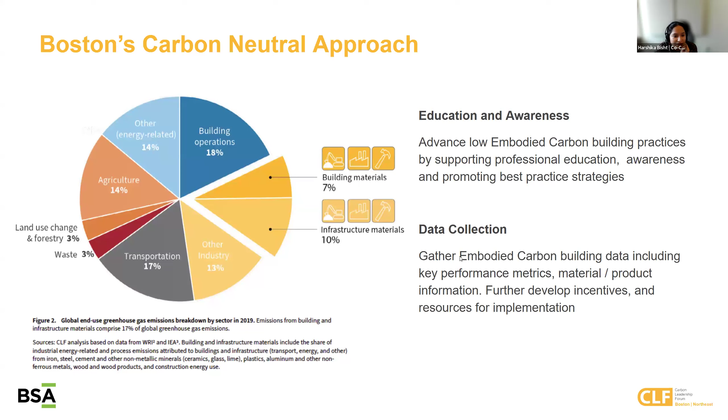These have been great steps that these cities have taken, including the net zero carbon zoning in Boston that, as Harshika mentioned, comes into effect next month. But these citywide regulations have really laid the groundwork for thinking on embodied carbon regulation.

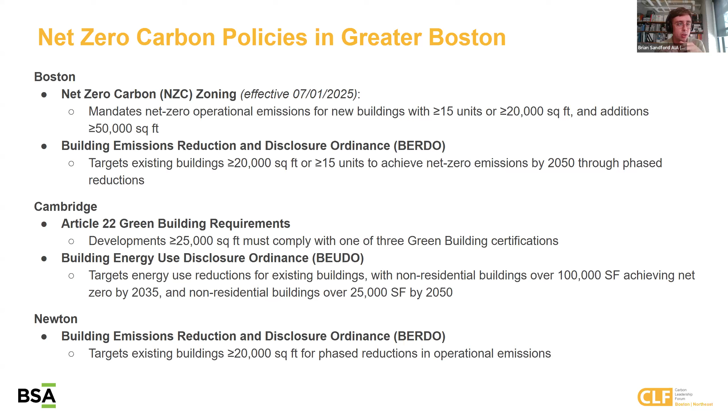Next, we have a quick intro to what's happening at the statewide level. Back in November, the governor signed a big climate omnibus bill. There's lots of stuff in here, but most relevant for our conversation is the Intergovernmental Embodied Carbon Coordinating Council. It's a bit of a mouthful, but it's this big council.

I know we have some members here on the call. There's folks from a bunch of different backgrounds on it, from the state, both the executive branch and legislative branch, as well as some professional appointees. What the council is working on is an embodied carbon reduction plan. This will have a whole bunch of recommendations, many focused on state building projects and procurement, and all those things the state can control directly.

But also, the bill specifically calls out that the council is charged with considering how to integrate embodied carbon reduction goals into state building codes, which would impact every building in the state, which is really exciting. To be clear, this is just getting going. These will be recommendations from the council, certainly not rules enacted quite yet. But I think this is part of this broader movement and trend that was kicked off by local municipalities.

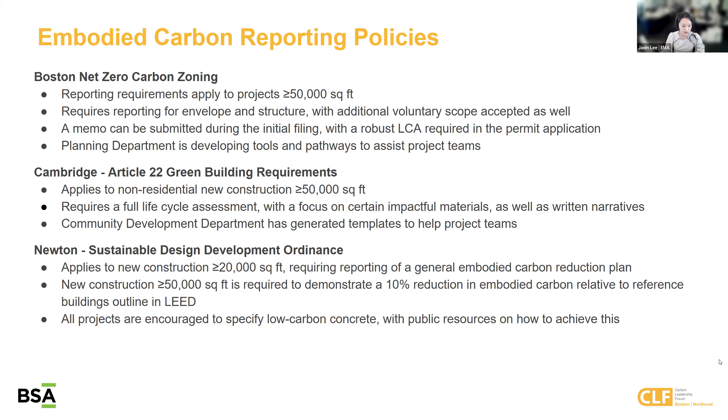If you see, the Boston effective date is coming up very close - it starts July 1st. Cambridge, the requirement already started. So did Newton, and the ILFI standards remain current. So does LEED. And that is all for the local policy section.

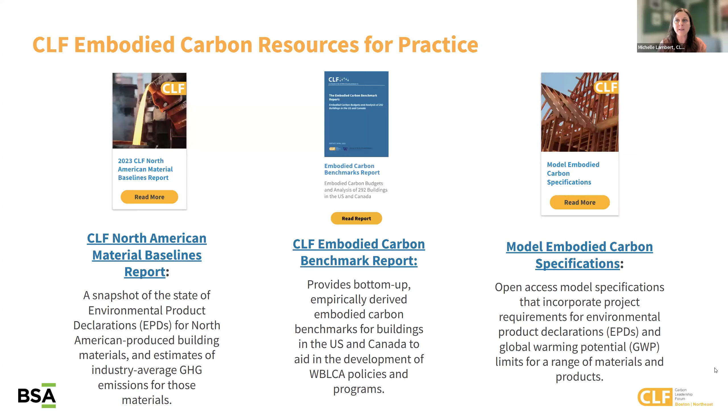Then just very quickly, we have a brand new compilation of 13 project case studies, if you're looking for project examples from a whole different range of sizes and types of projects, to really understand what their process was and how they were successful. All of these projects submitted their LCAs to us for review and demonstrated embodied carbon reductions. So again, another fantastic resource for some really good inspiration and examples.

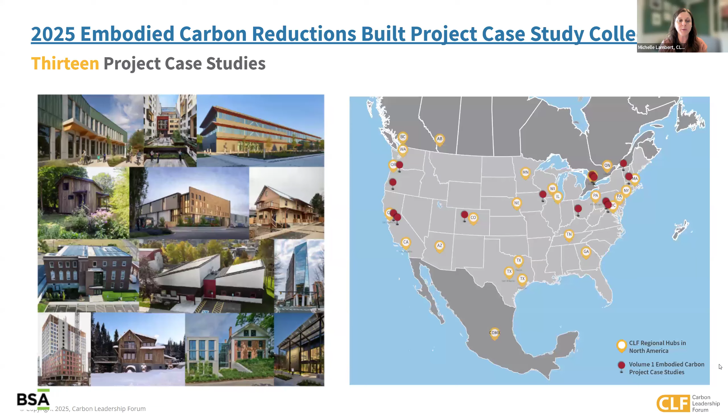The last resource I wanted to point to is that the CLF Boston Northeast Hub during COVID produced a whole series of recorded webinars that are on the BSA's website. You can see many different topics from many of the experts in our region, and each is a full hour recorded webinar on these different topics, so another phenomenal resource for digging into specific areas.

So how can you stay up to date? How can you get involved? There are three ways. You can join the CLF Boston Northeast Hub, an open membership community for anyone interested in learning.

Second is to attend the joint collaboration between the Boston Hub and the New York City Hub, which is an LCA tool user group that Jacob Savona, who is going to speak next, helps to run and facilitate. You can join that. And finally, the CLF nonprofit has a community forum on our website where you can submit your questions to the entire CLF community and get oftentimes a lot of really fantastic detailed answers. So make sure to check out all of those.

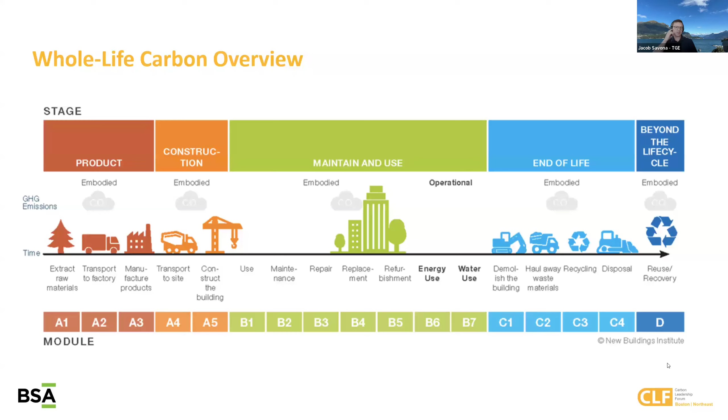Next slide please. So I wanted to run through some free early evaluation tools. Some of these are early tools, some can be used as a whole building LCA tool, but I'll explain that in a second.

I think the first and foremost, and probably the most popular one, is the EC3 tool, which is available to pretty much anyone with an EC3 account. You can use this tool to compare material-specific embodied carbon early in design using regionally specific EPD data, and you can complete what's called an A1 to A3 whole building life cycle assessment. Remember, that's just focusing on the materials themselves and not on construction plus maintenance and use plus the end of life of the building.

The next couple are the EPiC and CARE tools, which are really great quick whole building life cycle assessment embodied carbon estimating tools. You can put in minimal inputs to support early decisions around early concept designs for your projects, and understand some early design decisions and embodied carbon reductions that could or may not come from those decisions.

The next one is the BEAM tool, another free tool that's great at estimating embodied carbon across your buildings or portfolios.

You can use this for your policy or any benchmarking or high level assessments. This one can be used, I think, from SD to CA, but it is strictly A1 to A3, so it's important to note.

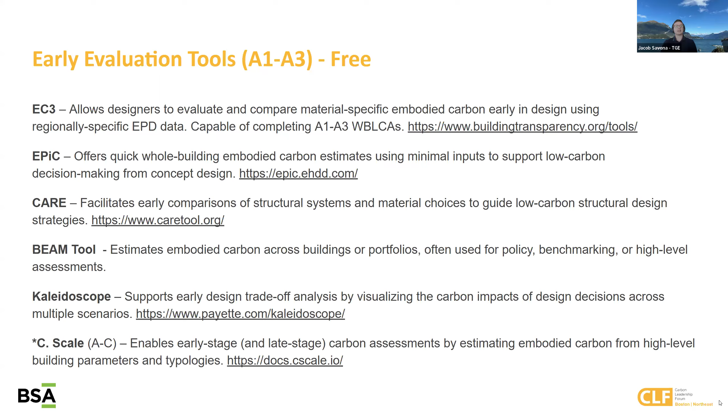Next slide, please. So here's the run through of the big three full whole building LCA modeling tools available. The first one to mention, and what's probably the most popular, definitely most comprehensive, and is widely used in Europe and starting to be used more readily here in the US, is the one-click LCA tool. One thing to note is that it is definitely the most expensive tool, around $5,000 per seat.

There is BIM integration, which is great for projects running in Revit. And it's important to know that it's easy to manipulate the model. What that means is you can put in your own EPDs into the model and understand the differences between industry average products and specific products with EPDs available. The most important thing to note specifically about the one-click LCA tool is that it puts the responsibility to create the model directly on the user, but it does allow the user to complete the calculations. That's a little different from the Tally tool.

I'd say Tally is probably the easiest tool for practitioners to use and get started with. It's really well integrated within Revit, and it's a little less expensive, around $1,000 per seat. The biggest difference between this tool and one-click is that it's kind of difficult to manipulate the model and use other EPD inputs. You can do that on your own, but it takes a little more practice and experience with the tool itself to understand how.

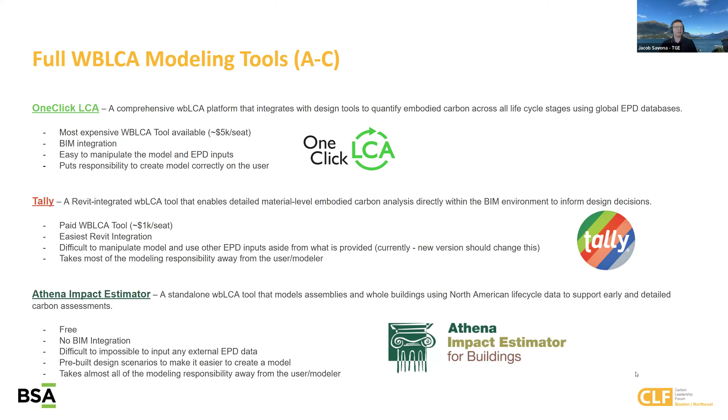Next slide, please. So where do all these tools lie in terms of the whole building LCA modeling workflow? From schematic design through CA, a lot of these free tools that I mentioned — Care, Epic, Kaleidoscope, the Beam tool, and C-Scale — can all be used in schematic design to understand different design or building scenarios. As you move through DD, you understand those design scenarios, maybe different assemblies, and start understanding the different reduction opportunities associated with each. Then moving through construction documents, that's when you can start to really use your OneClick LCA and Tally tools to understand the full embodied carbon assessment through design, through 100% CDs.

And then through the project procurement process, this is kind of just understanding, collecting all of the data around the materials that you're using on your project, getting product specific EPDs for all of those materials, or at least the relevant materials, and then finally conducting that full as-built embodied carbon calculation, which I'd say is probably the most important piece that we want to get into in the next slide.

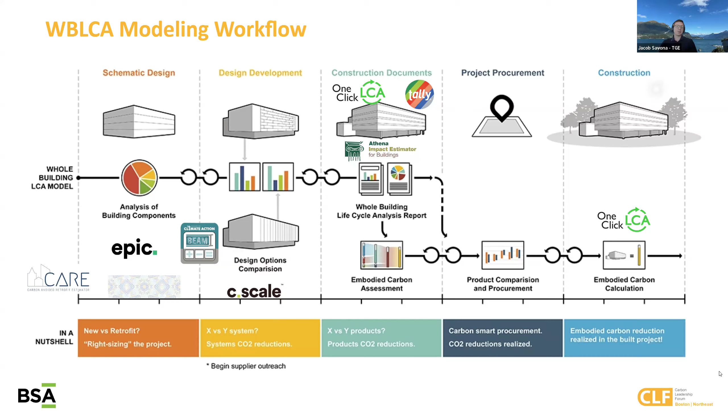Currently, the only tool that can do that is the OneClick LCA tool. That is the only one that can do that at the moment. Tally, I believe the new version of Tally will be able to do that. So that is important to note.

Once the next slide comes up, I'll just kind of run through. Sorry, just give me one second. Yep, no problem. In the meanwhile, folks, feel free to drop your questions in the chat, we'll try and answer them simultaneously. Okay, here we are. Sorry about that, Jacob. That's okay, just don't want to run over time. No, you're good.

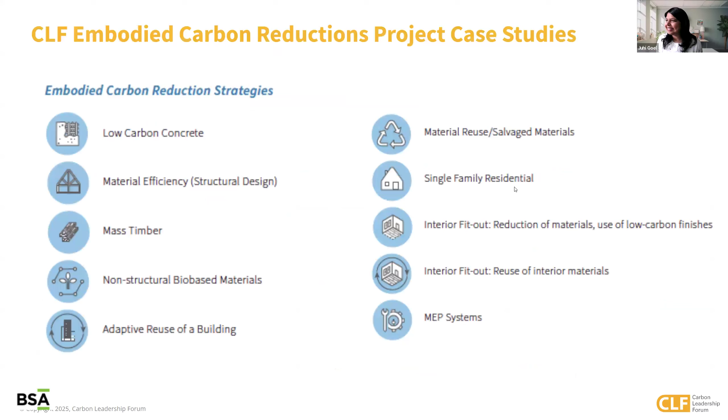Yeah, so just quickly understanding how to work with whole building LCA modelers, whether that's in-house, or whether you've designed, or whether you have a consultant working with you on your projects.

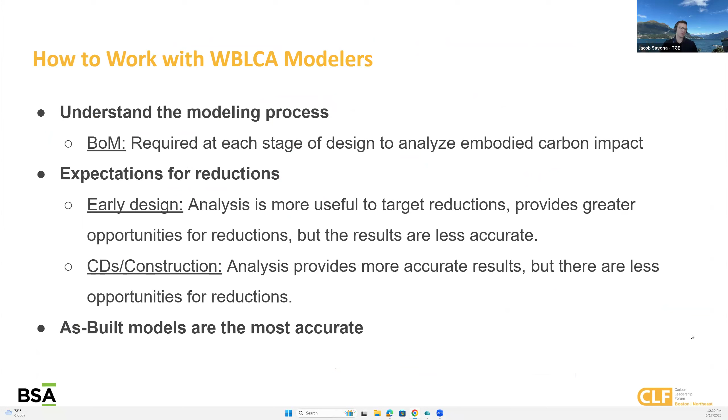First thing is first, I think the most important thing that you need to conduct an LCA is your bill of materials. This is basically required at each stage in order to analyze the embodied carbon impact at each stage, whether that's at SD, DDs is probably the earliest stage where you really have a more accurate bill of materials, and then obviously 100% CDs. And at the as-built model, that's where you're going to update that with what is actually being built in your buildings. It's also important to understand the expectations for reductions, and especially at which stage.

Early in design, thinking specifically comparatively to operational carbon, the earlier you can start looking at reductions and opportunities for reductions, this is when you're going to have more useful targets. You're going to have greater opportunities for reductions, but the result at this stage, your SD model, your DD model, is going to be a little less accurate. And then you move into CDs, and the opportunities for reductions aren't as great, so you won't really have as many reductions if you target reductions at this stage, but your analysis and your results are going to be more accurate, specifically in CDs and during construction or as-built.

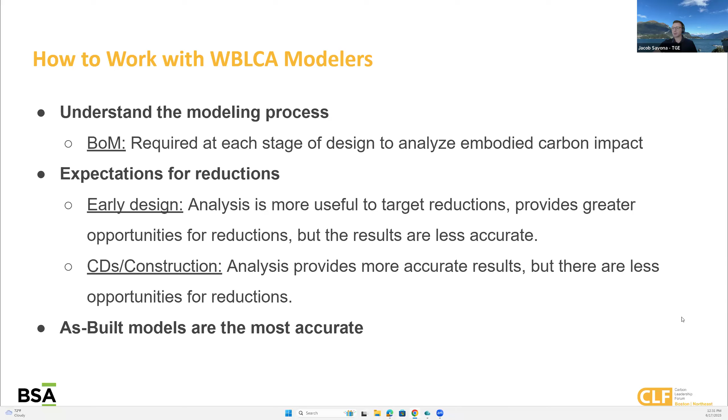The last thing I want to hit on before I say goodbye and hand it over is that the as-built models are going to be the most accurate and are definitely the most important in terms of constructing your whole building LCA models. Those are the ones that you want to be putting time and effort into creating, because that's going to reflect a really accurate result for your models. So with that, I'm handing it off to Patrick, who's going to talk through some embodied carbon reductions.

Great, thanks, Jacob. Yeah, Patrick Kenny from Thornton Tomasetti. I'm a structural engineer, so I'm going to walk you through really briefly what either the structural engineers on the call can do to make some reductions, or what architects can do working with their structural engineers. Go ahead to the first one.

This can seem like a really complicated process when you first come across it, but I always like to reiterate that measuring embodied carbon in your structure is very similar to just measuring the weight of a building. You have a quantity of materials, tons of steel or cubic yards of concrete, and instead of multiplying it by a density, like 150 pounds per cubic foot, you're multiplying it by a carbon intensity, a GWP. There have been a lot of great resources earlier in the presentation about where to find typical GWPs. So we know how to get a quantity, we multiply it by these industry average values, and we can get the embodied carbon of our structures.

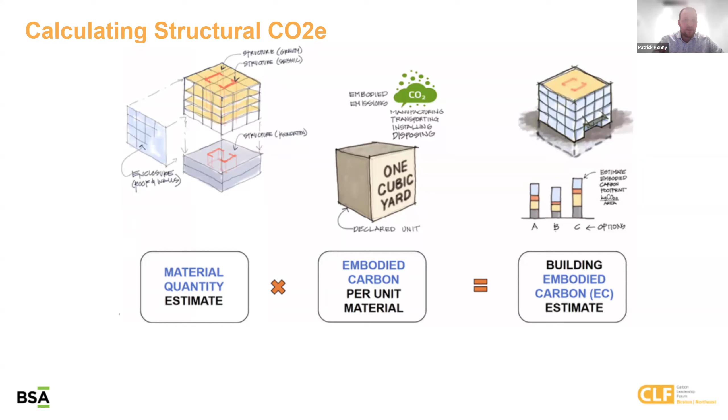So if you click one time, to look at how you might start reducing, I like to bring up a specific example. This might be a 4,000 PSI flat concrete floor slab. Just picture a big floor slab, it's 100 cubic yards of concrete. And maybe each of those cubic yards of concrete, you look up, and that is about 300 kilograms of CO2. This is a typical value you might see. So the total embodied carbon of that slab is about 30,000 kilograms. So if you want to reduce that, you might start with the material side.

So if you click one more time, you look at that 300 number, and click again, please.

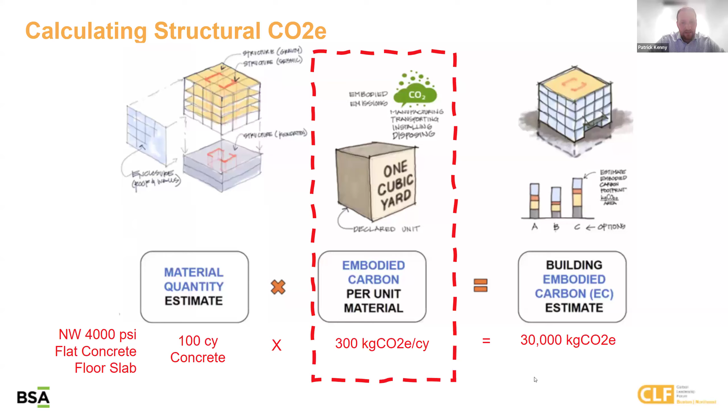And you might ask yourself, can I get concrete that's less than 300 kilograms a cubic yard? So that's sort of the first stop is, can we look at the material and do any better than this? So the answer is yes.

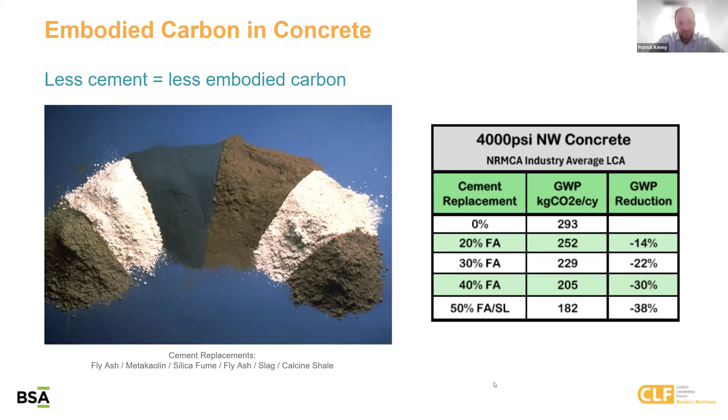The other way we can manipulate the amount of cement in our mix is changing the strength of our concrete. Roughly, the cement content is going to scale with strength as we go from 4,000 to 5,000 to 6,000 PSI concrete. You're using more cement in every cubic yard, so your embodied carbon is going up. As a plug, these values all come from the SE 2050 site. They have what's called an ECOM, an embodied carbon estimator. Great first stop for structural engineers. This has some really good average value GWPs, and you can just punch in your quantity and get an outcome.

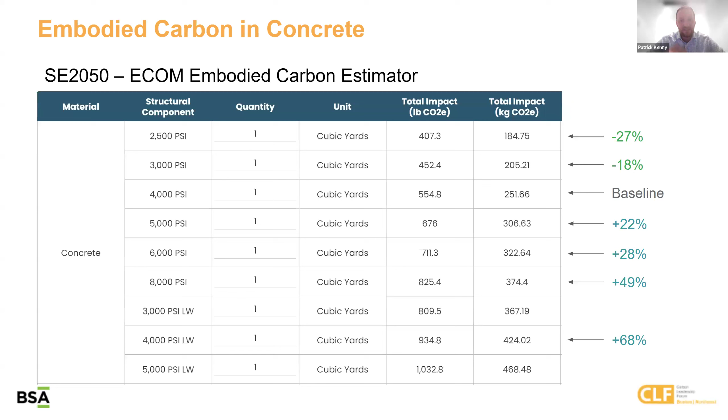If your baseline is 4,000 PSI concrete, as you get those higher strengths, your embodied carbon is going up 20, 30, 40%. And if you were to scale down those numbers, it's reducing. This doesn't always mean use lower strength concrete. It means that this is a lever we can pull. We can either use higher strength or lower strength and manipulate the quantities. This is something your structural engineer can use to try to optimize for carbon.

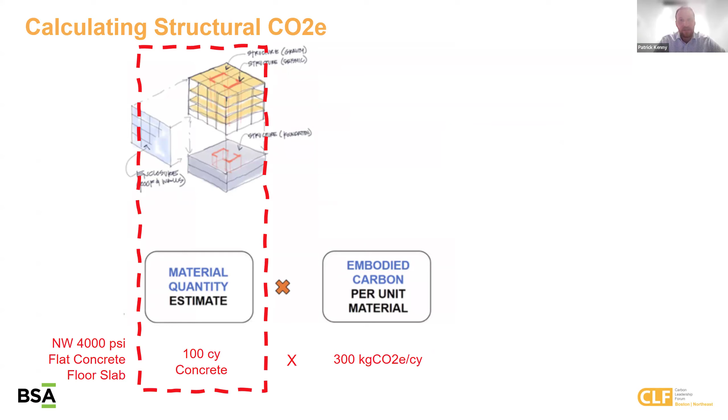So we can come back to this basic equation. We looked at that 300 number. The other thing we can do is look at the material quantity. Do we actually need 100 cubic yards of concrete? How might we manipulate that number? Can I use less than 100 cubic yards? Sorry for all the animations, I'm usually the one clicking through these slides.

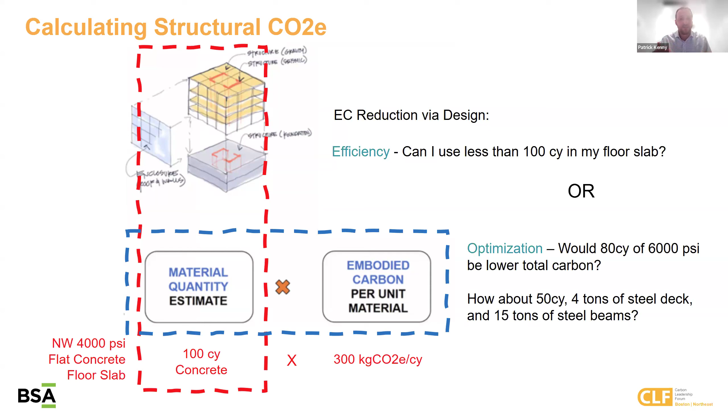You can look at those two things together, the quantity and the material intensity, and try to optimize. You might ask yourself, could I use 80 cubic yards of 6,000 PSI instead of 100 cubic yards of 4,000 PSI? Or change the whole system from concrete to steel and see what combination of materials and intensity gets you the lowest carbon solution.

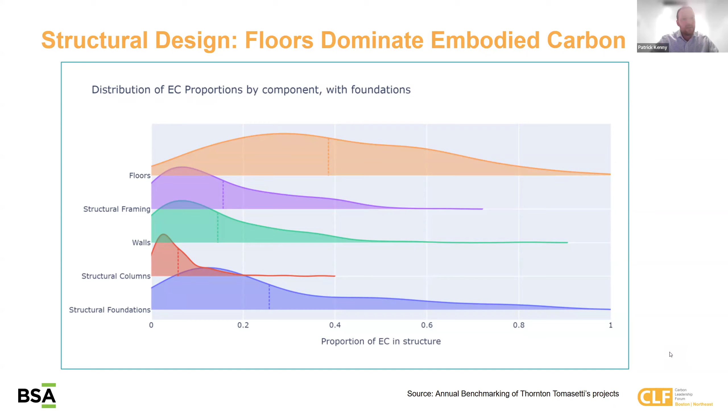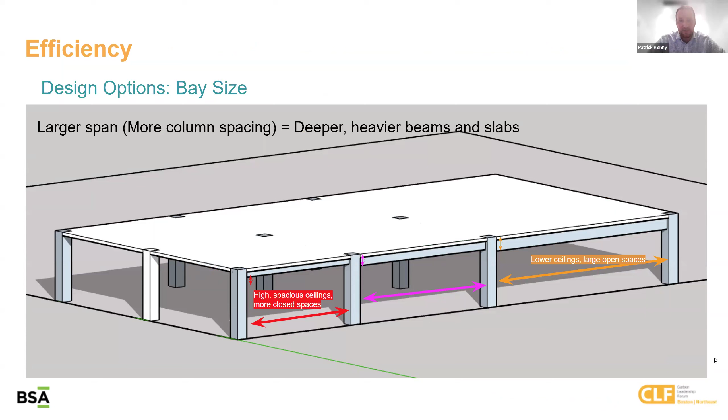This will be familiar to structural engineers, but on the efficiency side, something as simple as bay size. As you get your columns closer together, you're going to shrink your slabs and beams and drastically reduce the quantity of structural material you're using. Structural engineers will be familiar with many different ways to increase efficiency.

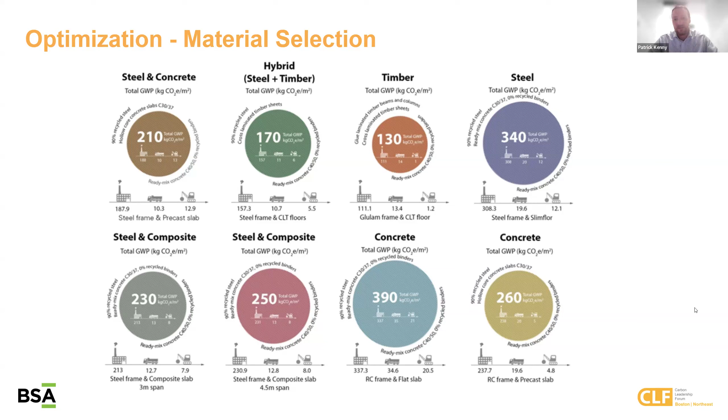Then there's material selection, this optimization question. If I look at different combinations of things, steel and composite slabs, or concrete cast in place, or precast - this is one building designed with 8 different structural systems, and the number there is the embodied carbon per square meter of floor area. This is not a rule that this pattern will always hold for which one is high and low, but it means your embodied carbon is going to vary a ton based on what system you select. So studying a few different systems early on is going to be a great tool to make reductions.

As a last plug, you can use materials besides steel and concrete. A great one with a much lower carbon footprint is timber. There was a mass timber accelerator program between 2021 and 2024, a partnership between the BSA and the BPDA, which took local projects and studied whether they could be done out of mass timber.

I participated in this program. It was great. It connected project teams with timber experts, and the outcomes showed a lot of benefits to using mass timber. You could get really efficient floor-to-floor heights with a nice low-profile cross-laminated timber slab. It reduced building weight, which is especially beneficial with challenging foundation considerations, and you could reduce foundation quantities. Obviously, there's a reduction in embodied carbon for projects looking to get aggressive reductions.

It's a beautiful material, it's biophilic. I'll add that my project studied it as a market differentiator—these buildings look a lot different, so developers are often interested in the premiums they could get for apartments or office spaces that are different from the rest of the market. It's also very fast on erection time, one of the fastest materials to erect that we have, so it can really help construction time as well.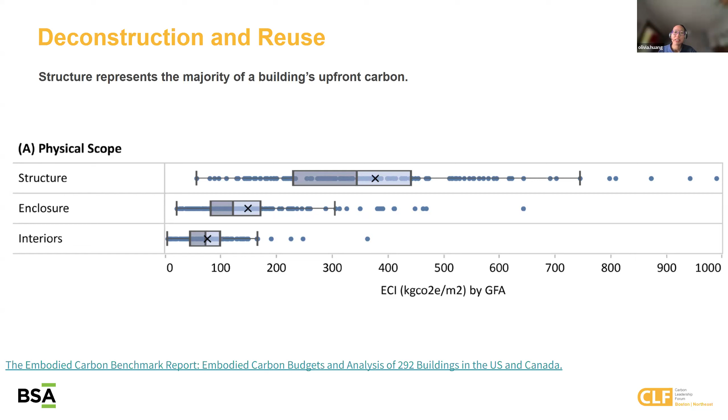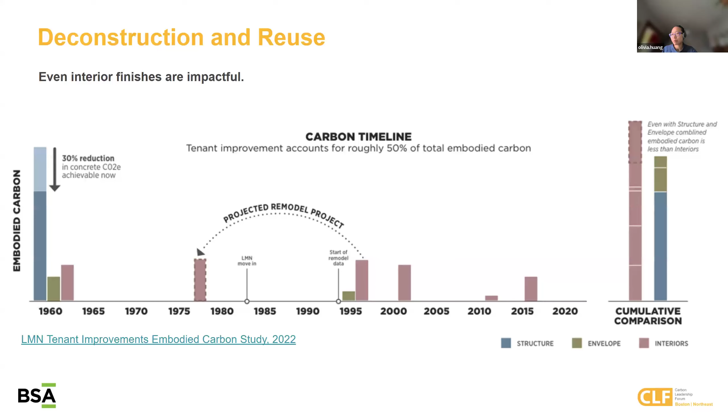But I'll also make a plug that interiors have a major impact. If you're reusing your building, then interiors are where you have agency in reducing carbon. Interior finishes are also the ones most likely to be refreshed every 10 years, say, so once you're renovating a building and updating the interiors over and over, those add up quickly in terms of carbon. And that's where reuse comes in.

A lot of the materials that are easily deconstructed and reused today do contribute to those interior finishes—furniture, equipment, appliances, millwork, fixtures. I'll share some strategies for whether reuse works for your project and how you can apply it. Some opportunities are if you have any of these commonly salvageable materials, if you have a lot of them, or if they're valuable, such as stone or marble, or have historic or cultural value—things we don't make anymore, things that are really stylistic of their time.

These photos are from a project that Goody Clancy did at Cornell University. We saw an opportunity where we were renovating this dorm that had hundreds and hundreds of solid, beautiful wood doors. They couldn't be reused as doors due to code because they were too small for what we'd use today, but we repurposed them into wood wall paneling, cut out devices and hung AV. We also retrofitted a bunch of light fixtures to keep the character of the building within the renovation.

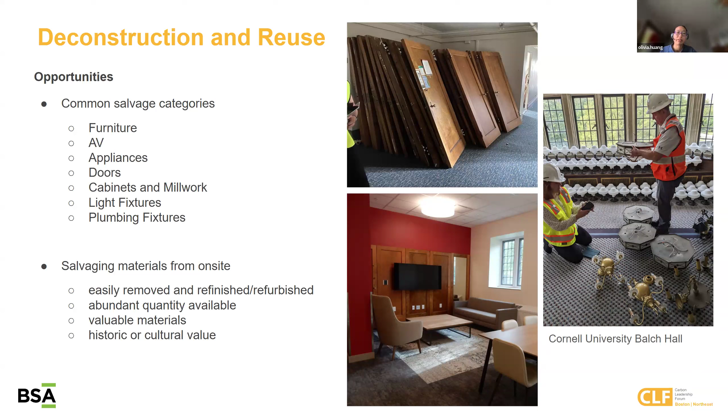Some design strategies for reuse. Ideally, you reuse materials for the highest and best use—keep structure as structural materials, salvage doors as doors. But knowing that you can't always do that, you can downcycle them into things that require lower performance.

An example would be exterior windows that wouldn't meet performance standards today, but you can reuse them as interior glazing, as borrowed lights. Another strategy I like is to do reuse in back of house spaces.

Sometimes clients are concerned about how it will look, whether it matches the aesthetic of the rest of the design, but there are a lot of spaces in our projects where those aesthetics, or matching everything, are not as much of a concern. So use it for the bathrooms or the mechanical spaces.

I show another case study Goody Clancy did, here in Massachusetts. We had a lot of this perforated metal material shown on the top, and we saw that as an opportunity to upcycle it into feature wall paneling in our main design space.

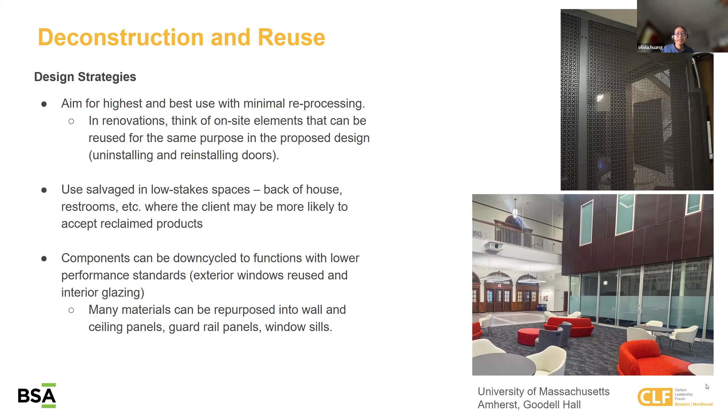That's it from me. Thank you.